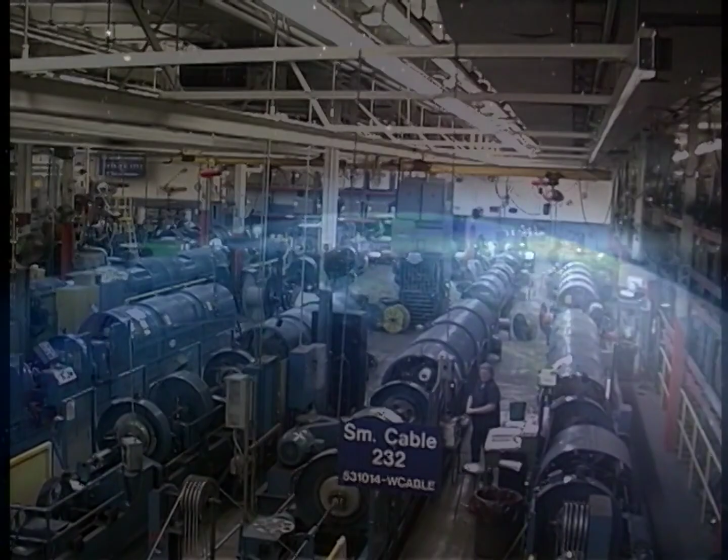RSCC is a member of the Marmon Wire and Cable Group, with 13 member companies, 20 locations, and revenues in excess of $2 billion. It is the fastest growing supplier of specialty wire and cable products in North America. The Marmon Wire and Cable Group is a Berkshire Hathaway company.

We specialize in engineered products resistant to the effects of chemical, extreme temperature, radiation, moisture, corrosion, fire, and other use hazards, providing optimal effectiveness under conditions where ordinary cables fail to perform.

Founded in 1918, its origins began in 1913 with a young inventor named J. Allen Heaney. A contemporary of Thomas Edison, the Heaney Laboratory occupied part of the original Eli Whitney factory. Patterned after Edison's Menlo Park and located in Hamden, Connecticut, here Heaney developed and patented the process for applying fibrous inorganic insulation on electrical wire.

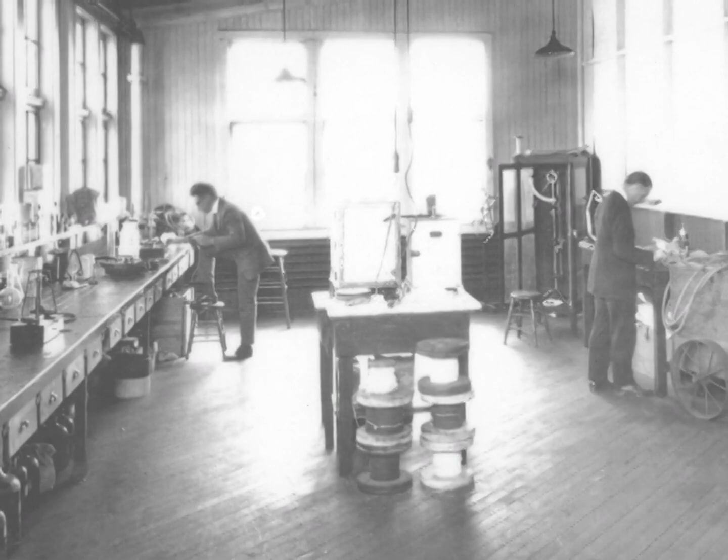In 1918, Marlin Rockwell, a wartime subsidiary of Marlin Firearms, acquired Heaney's patents and processes and then formed the Insulated Wire Division. The Rockbestos name first emerges, and a 90-year heritage of innovation begins.

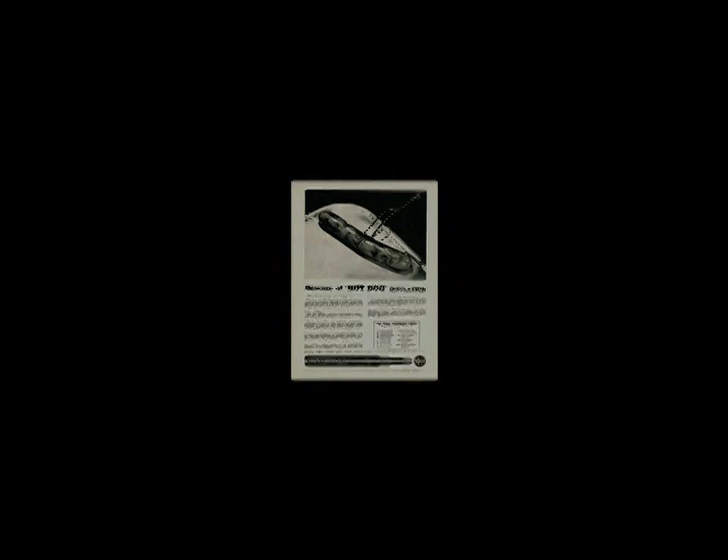In 1922, Rockbestos moved to a new factory on Nicoll Street in the city of New Haven, where it remained for 70 years. The superior performance of this unique insulation to resist degradation from high heat and continued flexing found many uses in transportation, industry, and newly electrified kitchens.

In 1924, the New Haven Railroad urgently needed a solution for devastating fires generated by faulty cables on electrical locomotives, resulting in the development of a hugely successful product. This marked the origin of our long history with the rail industry.

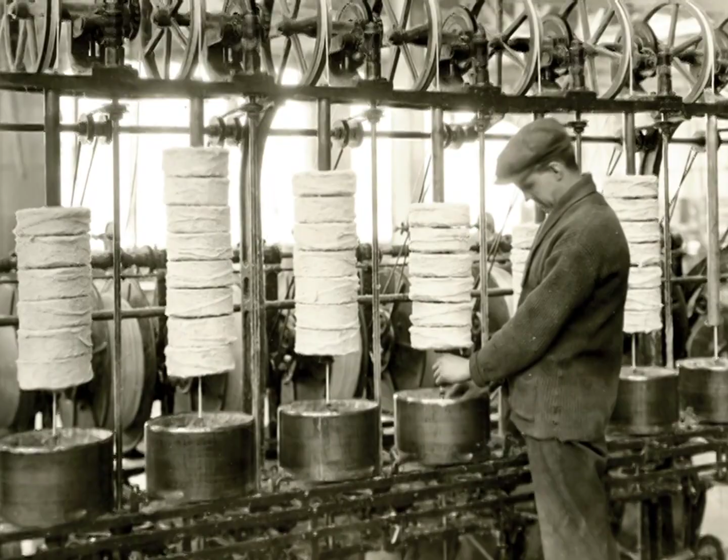Canadian stove manufacturers who bought Rockbestos wire discovered that on the long sea voyage to Australia and New Zealand, moisture penetrated the insulation, causing costly rewiring. By adding varnished cambric tape over the conductor, Rockbestos solved the problem, establishing the AVC product line as the benchmark for heat, fire, and moisture resistance cables.

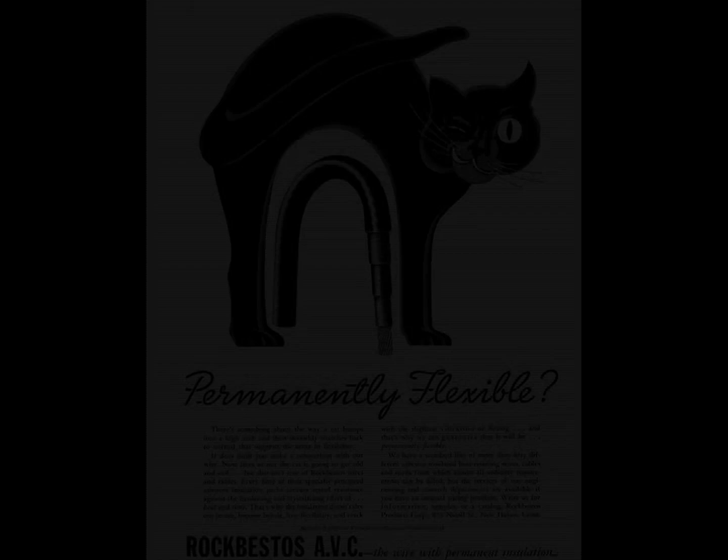This versatile AVC design was then utilized to solve similar problems that occurred on mining machines operating in underground coal mines and on commercial and military ships.

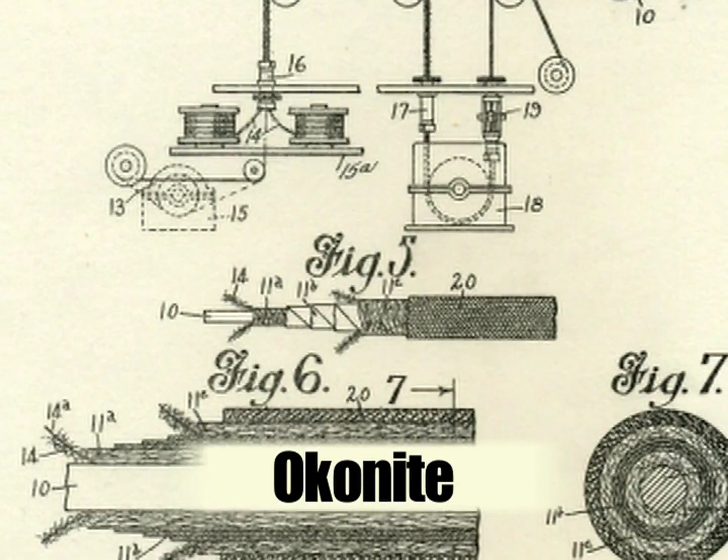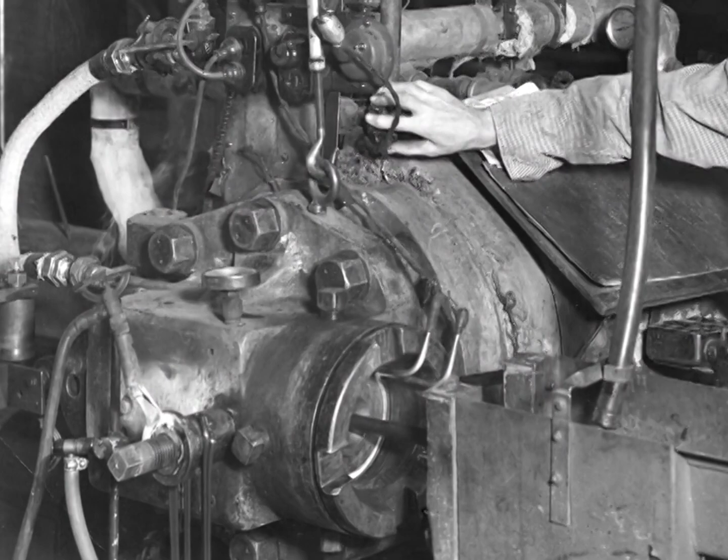Patents issued in 1932 allowed Rockbestos to license our technology for the design and manufacture of type AVA cable to manufacturers such as General Electric, Okonite, Anaconda, Phelps Dodge, Phillips, and others. In 1938, Rockbestos installed its first plastic extruder, paving the way for the next generation of cable technology.

The advent of World War II brought Rockbestos technology to the aid of our country. Now regarded as a leader in ruggedized designs for harsh environments, Rockbestos products were ideal for critical military applications.

After the U.S. Navy determined that only Rockbestos cable would endure a catastrophic onboard fire, it adopted the patented AVC design for the fleet. This turned out to be a life-saving decision which enabled the USS Franklin to make a 13,000-mile journey home under its own power after withstanding a horrific kamikaze attack off the coast of Japan.

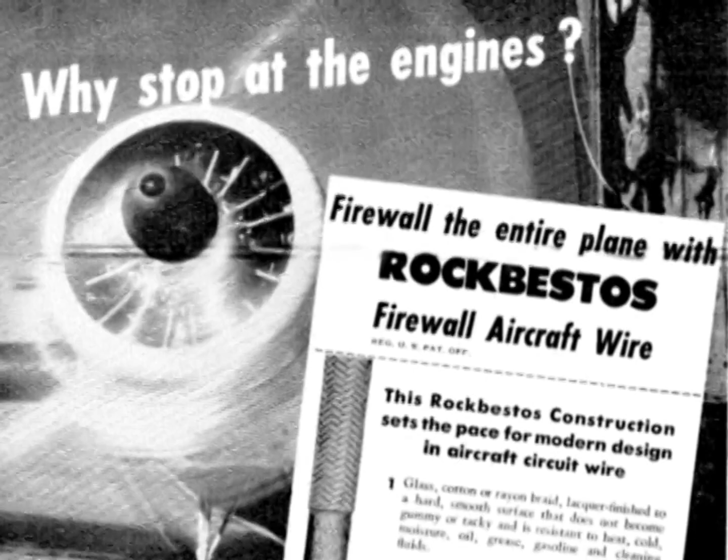Lightweight, heat-resistant, firewall aircraft wire became a mainstay in military aircraft. Originally developed to withstand intense heat generated by vacuum tubes and radios, Rockbestos wiring evolved into the standard for engines, flight control, and weapons systems. For many years, anything that flew likely had wire from Rockbestos aboard.

True to its innovative roots, in 1948, Rockbestos introduced PNR, a unique control cable that combined polyethylene with a thin coating of nylon. This tough, durable, revolutionary design greatly reduced size and became widely accepted by the cable industry. Copied by many, this innovation was the genesis of today's basic building wire, UL-type THHN.

The post-World War 50s launched a technology explosion, and the jet age captured the imagination of America. Based on its well-established aircraft experience, Rockbestos immersed itself in developing state-of-the-art cables, specifically designed to meet the demanding needs of the emerging aerospace age.

FireZone's unique capability to endure extreme high temperatures while still maintaining circuit integrity made it ideal for flight-critical applications. Industry leaders Douglas Aircraft, Boeing, Lockheed, Grumman, and many others soon came to rely on FireZone in pioneering designs from Rockbestos.

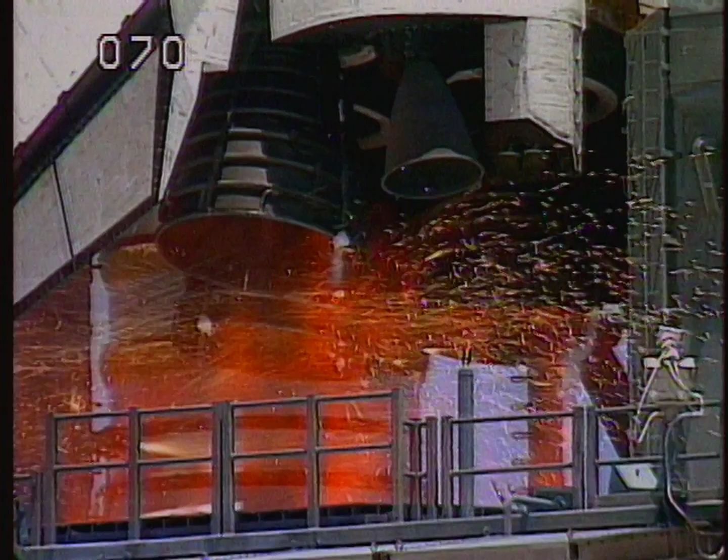The 60s gave birth to the space race, with national security and pride at stake. In this arena, Rockbestos was a significant contributor to our nation's progress, paving the way for Rockbestos' leadership role for decades to come.

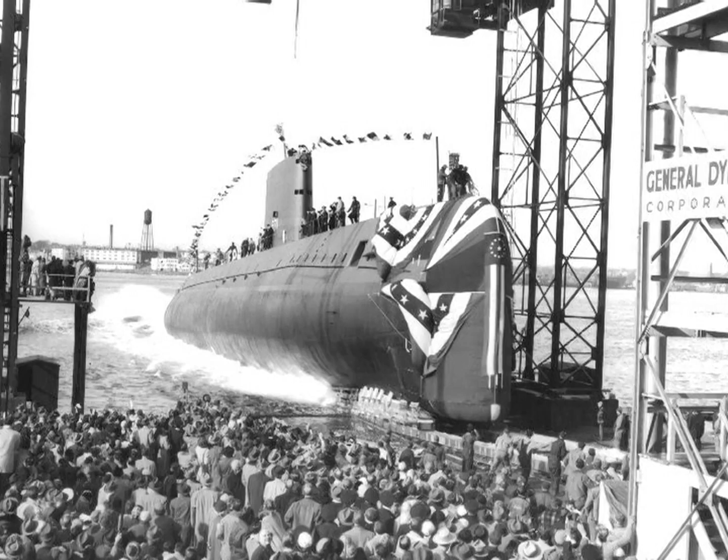The Navy selected Rockbestos wire for the first nuclear submarine, Nautilus, launched in 1954. The success of the Navy's nuclear power program inspired electric utilities to invest in construction of nuclear power generating stations. In the late 60s, feverish construction ensued as the nation envisioned nuclear power as the answer to our future energy needs. Recognizing opportunity and intrigued by the technical challenges of this significant new market, Rockbestos became one of the first manufacturers to supply qualified cable.

Starting in the mid-70s, Rockbestos began a 30-year period filled with critical facility and technology decisions that would forever shape its future.

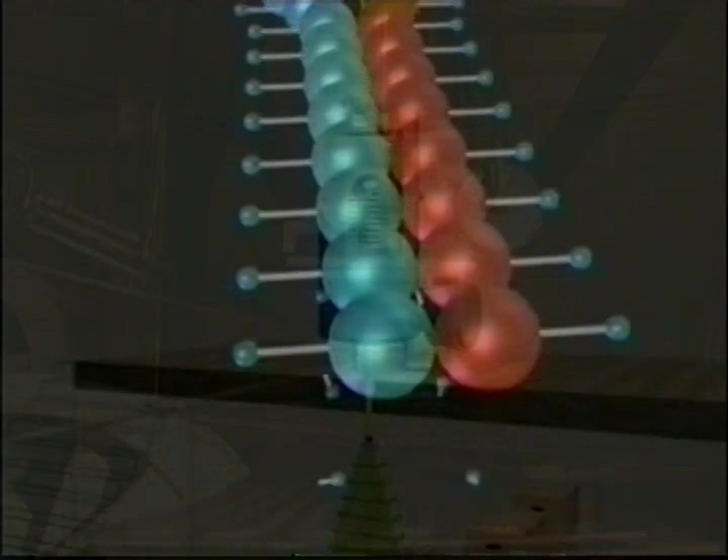Spurred by success and rapid growth in the nuclear market, Rockbestos embraced an exciting new cross-linking technology and constructed a state-of-the-art manufacturing facility. This would once again solidify its position as an innovation-driven leader.

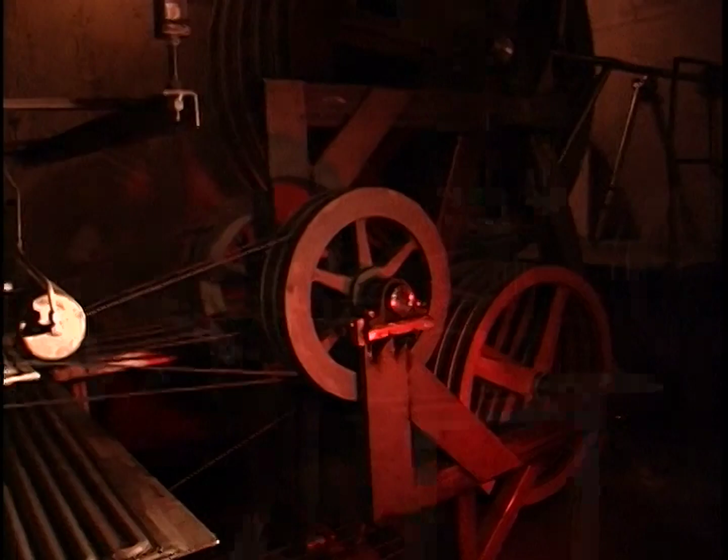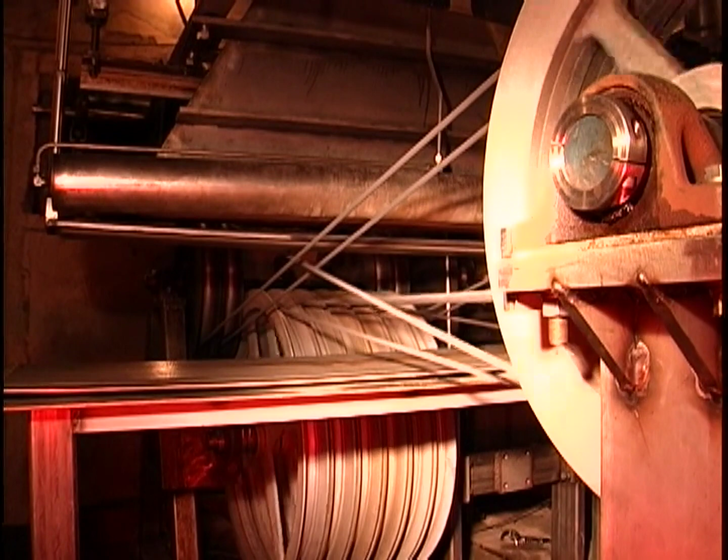The electron beam irradiation process exposes cable to high levels of electrical energy for the purposes of cross-linking, or altering the chemical structure of the polymer material. This greatly enhances durability, resistance to heat and chemical attack, and many other physical properties. It also provides superior electrical properties, as the resulting materials are cleaner, eliminating residual contaminants associated with vulcanization. Additionally, irradiation permits cross-linking of many new materials once considered unsuitable under conventional techniques.

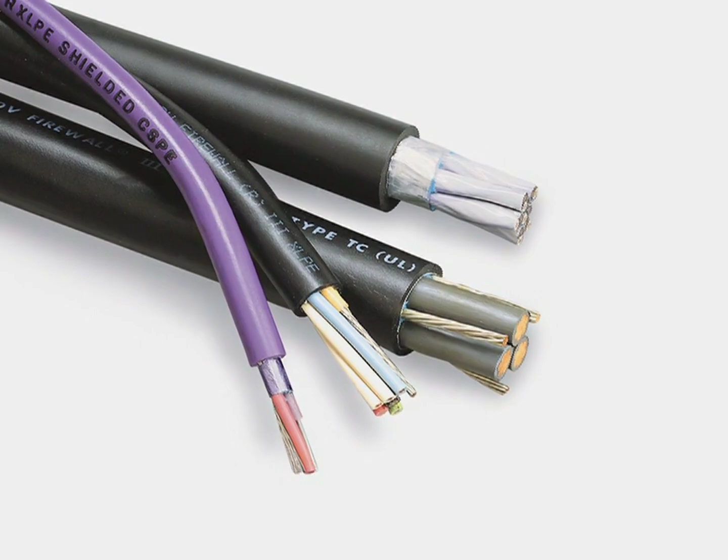This technology inspired the Firewall 3 product line, which became the flagship product for numerous industrial markets and emerged as the product of choice for the nuclear industry.

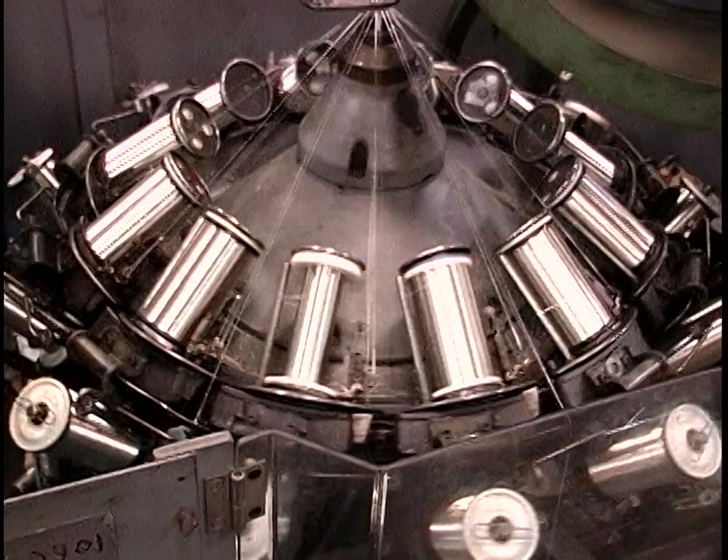Faced with trying economic times, Rockbestos made the difficult decision to close its aging New Haven facility and relocate operations to East Granby. The combination of Rockbestos and Suprenant brought together the two leading manufacturers of high-end specialty cable in North America. The beauty of this merger was that there was little crossover in markets, while both companies shared common ideology with respect to innovation, research, and product development.

Additionally, Suprenant, like Rockbestos, was highly invested in the electron beam irradiation process.

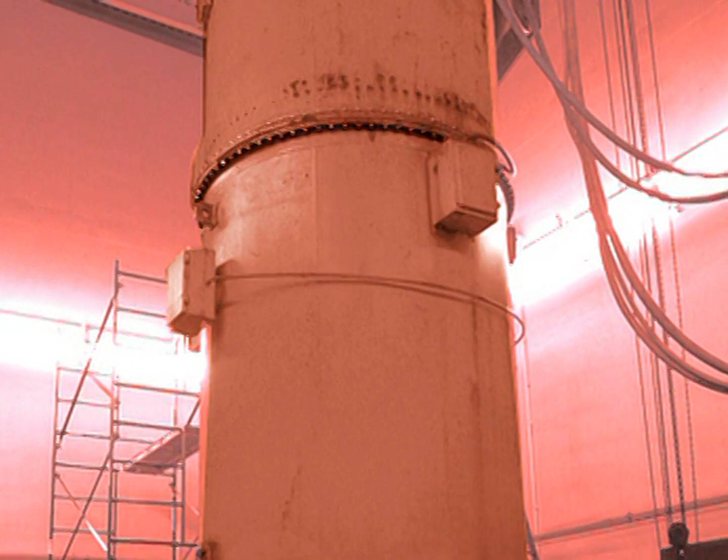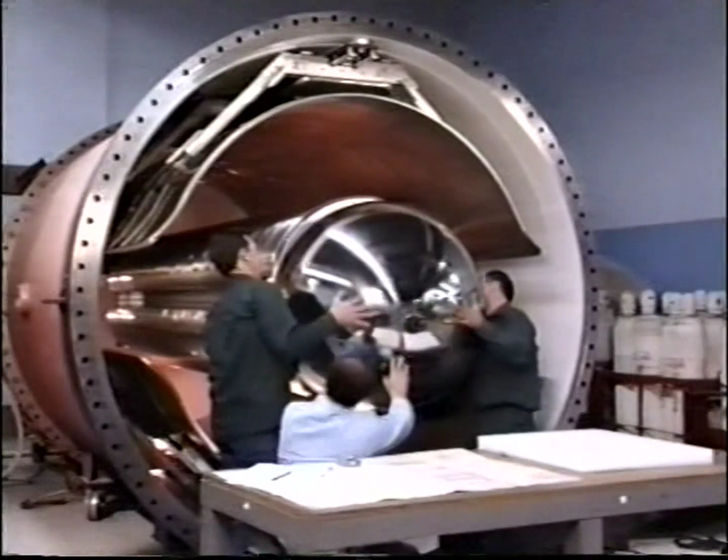Combating adverse economic conditions in 2004, Rockbestos reluctantly concluded it must close the outdated Clinton facility and relocate operations to East Granby. Unlike previous moves, this involved relocation of massive irradiation units and significantly expanded the East Granby infrastructure.

In spite of all these changes and transitions, RSCC kept its focus on innovation, technology, and problem solving. Many of the cables developed during this period have become synonymous with product excellence in the markets they serve. This drive for technical excellence, along with a focused commitment to served markets, has uniquely positioned RSCC as the leader in many vital markets.

Hi, I'm Dennis Chalk, President of RSCC.

Continuous innovation, accompanied by our strong adherence to 80-20 principles, has made RSCC the premier engineered wire and cable manufacturer in the world. Through business segmentation, adaptation of lean manufacturing principles, and key customer focus, we feel strongly that we've created a company that is well positioned to handle the challenges of an ever-changing, complex global business environment.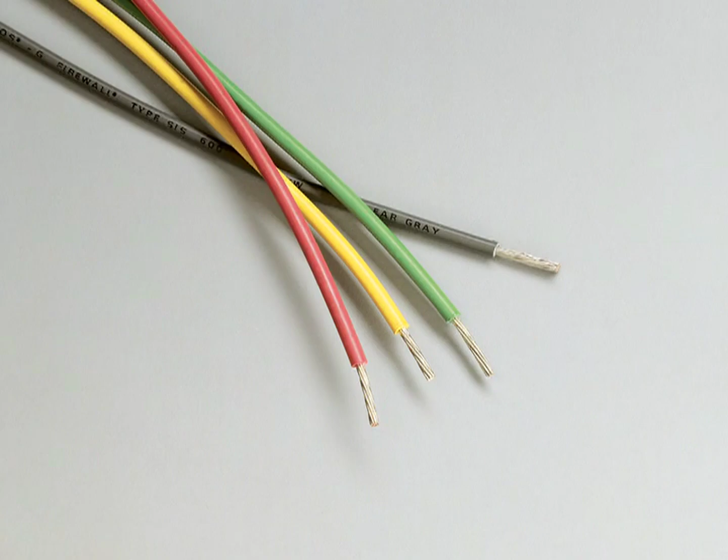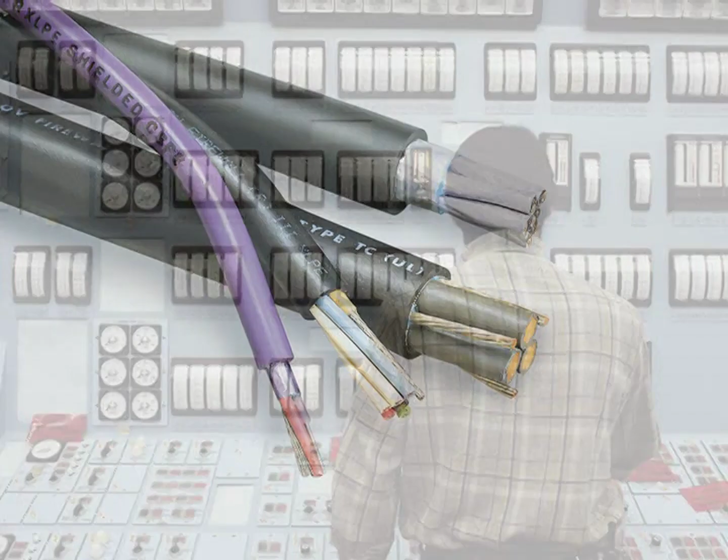For the past 30 years, RSCC has been the leading supplier of nuclear-qualified cables throughout North America. Its vast array of low-voltage control, power, instrumentation, and specialty cables can be found in all operating plants within the United States. As the unquestioned technical leader, RSCC is currently working with key industry leaders in preparation for the rebirth of nuclear and the technological challenges facing the next generation of reactors.

Over the past decades, both of North America's two leading locomotive manufacturers have come to depend on the quality and performance of RSCC's Exane product line. As they extend their reach across the globe, RSCC is again leading the way with its unique low-smoke, zero-halogen technology. Over 90% of all transit vehicles operating in North America utilize RSCC's Exane. Its performance record is unparalleled, and it is clearly established as the benchmark for success in this industry.

RSCC's historical leadership in the area of fire safety is unprecedented and continues today with new products that advance technology and enhance life safety initiatives. In recognition of this new level of achievable performance, national codes and standards are evolving to mandate these advances in an effort to further protect lives and property in the event of a fire.

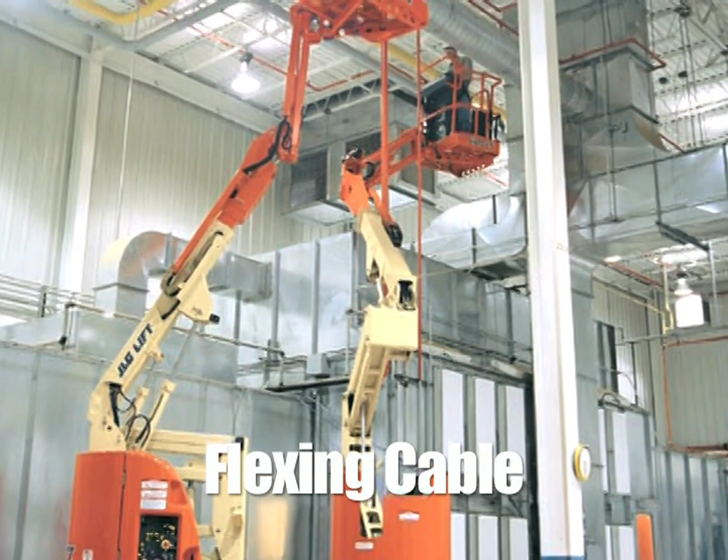With equipment scattered around the globe, electric lift manufacturers have reliability and service considerations that cannot tolerate cable failures. That's why the leading manufacturers of both man and material lifts rely on RSCC cable.

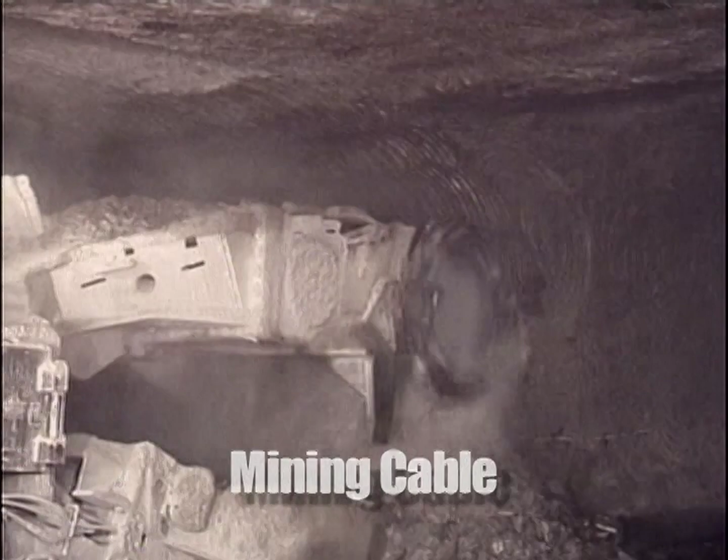For over 40 years, RSCC has been the vendor of choice for the leading manufacturer of underground mining machines. In this extremely demanding environment, there's no room for second best.

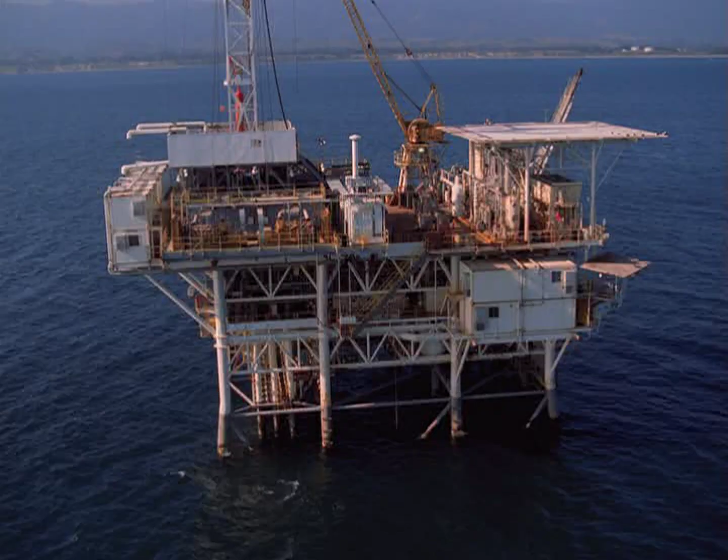The offshore oil business is no place for the inexperienced. RSCC has provided service to nearly 2 generations of rig workers. In this hostile, remote environment, Exane is considered a reliable member of the crew.

Now, when energy is recognized as a critical and scarce resource, RSCC's downhole sensor technology is assisting oil companies and service providers with the means to farm deep subsea wells with greater efficiency.

We're extremely proud of our 90 years of continuous innovation, and we salute the thousands of employees that have made our success through the years possible. We also salute the key customers that have provided us the opportunities, challenges, and resultant business opportunities that made this all possible.

Calvert Wire and Cable has been a distributor of Rockbestos products for over 20 years. Together we have established a true partnership to grow sales of engineered wire and cable products. From all of us at Calvert, we congratulate Rockbestos on reaching the milestone of 90 years in business and look forward to a great future together. Congratulations.

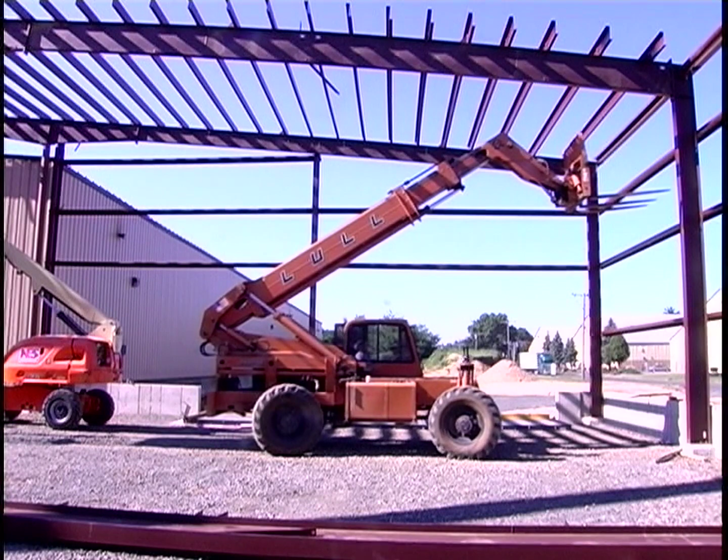Thank you. We're equally excited about our future, through joint ventures, acquisition, and plant expansion, and most importantly, manufacturing excellence. It is our plan to build on these 90 years and create a company that will thrive for many generations to come. Thanks for being a part of our history, and we look forward to working with you to create a successful future. RSCC, proud of our past, positioned for the future.